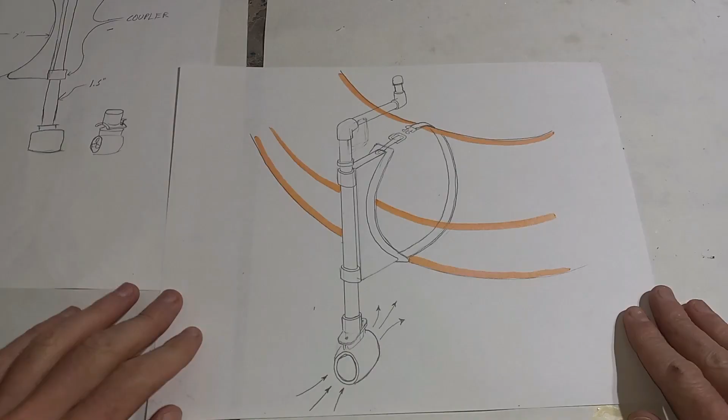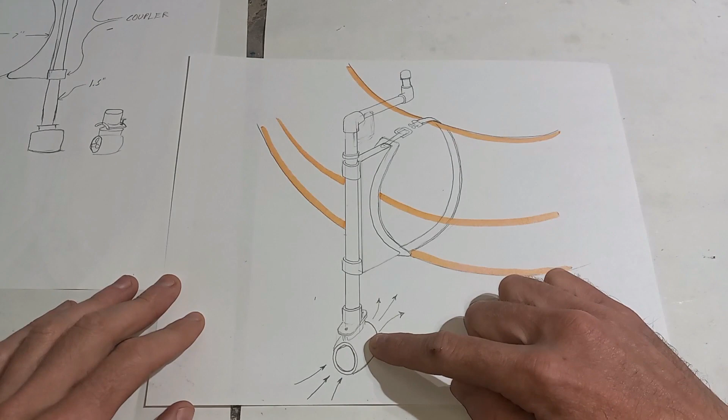So this is our plan here, and you can see this would be like the inner tube. Basically it's a waterproof thruster motor that goes on the end of this PVC steering apparatus, and we hook up drill batteries in here to power the whole thing. The idea is that it clamps around any existing tube, so you could take this to tubing outings and just throw it on any of their tubes.

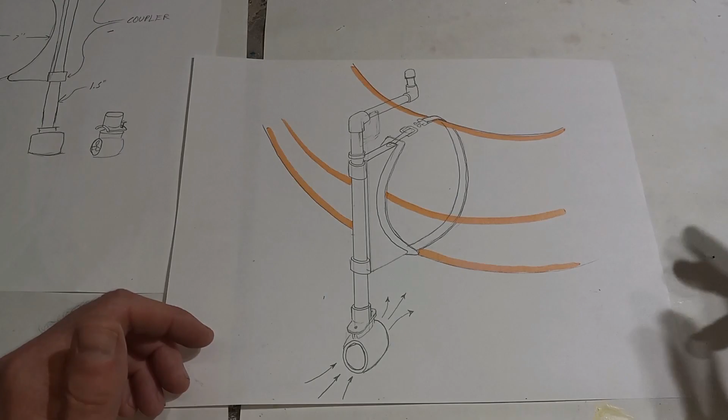For the electrical components to power this thing, we sourced one of these brushless underwater thruster motors from Amazon, and this should provide enough power to push it around. I've seen reviews of people using these on kayaks and stuff, so a tube, it's not as aerodynamic, but it should probably work just fine.

And then we have a brushless motor ESC here, a speed controller. Why I went with this one is that it has a built-in rheostat on it, so it's kind of like cruise control. Basically, you just spin this and that sets your speed.

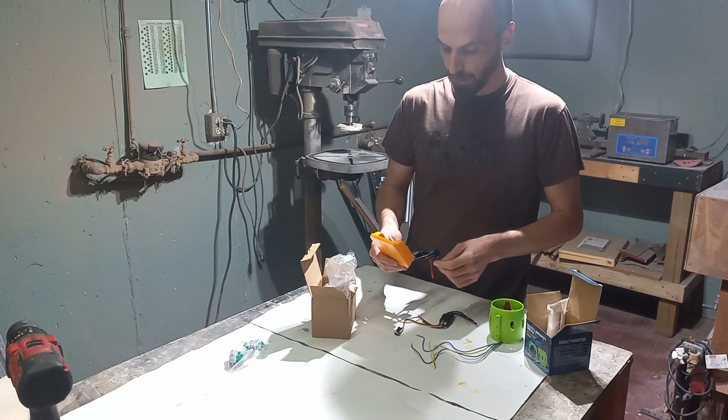And then to provide power to it, we got these drill battery adapters, and they make them for Milwaukee, Dewalt, pretty much all the big name batteries. I have Bauer, which is the Harbor Freight ones, so that's what these are going to be used for. These are actually the Dewalts, but supposedly they work on Bauer as well.

So let's bring you in here and we'll start just setting stuff up to test the functionality before we get into extending wire lengths and making the rest of the apparatus.

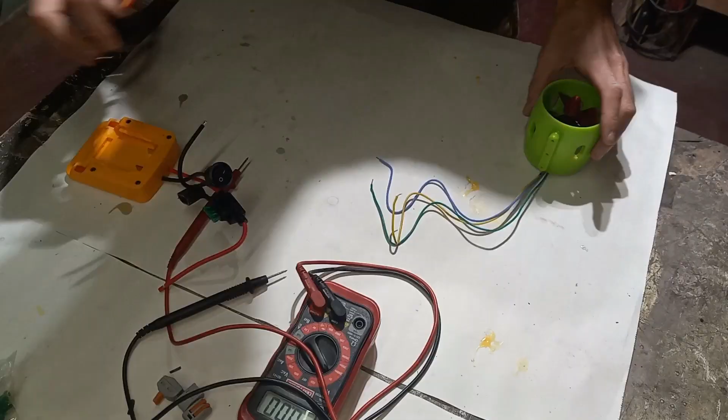To start on the wiring here, I did run into an issue: Dewalt is not exactly the same as these Bauer battery packs. In order to get this Bauer pack to fit in here, there's a little tab here I had to cut off, and I also had to cut off these guys here. So if you're trying to use a Bauer pack, you'll have to do that, but if you're using a Dewalt, you won't have to do any of this kind of stuff, and if you use Milwaukee, you won't have to do that either. But let's just hook it up and verify that we're getting power out of here.

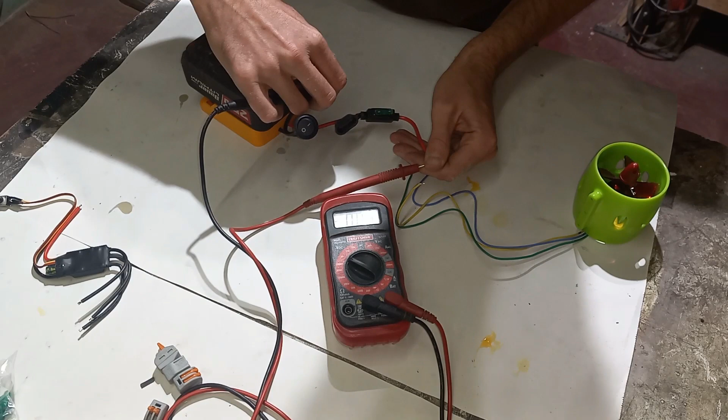Maybe we have to turn it on. There we go. 19.4, that's good enough. All right, so we'll just disconnect this for the meantime.

To run our connections here, the battery pack goes to these, and then these three wires go to the motor. Pretty easy setup. And just to test and verify that everything's working fine, we're just going to use these little quick connects, they work really good for this kind of stuff.

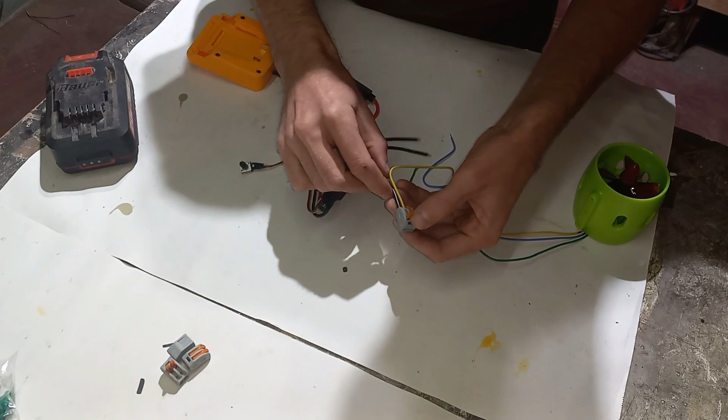That one didn't bite. There we go. All right, so we have everything wired up, probably took a couple of minutes. It's pretty easy to test out with these things and clip them all together. So let's throw in our battery pack here, and I think we are on. Let's test and see. So that's full power. And off. All right, that's awesome.

So that's motivating enough to continue with the rest of the build here.

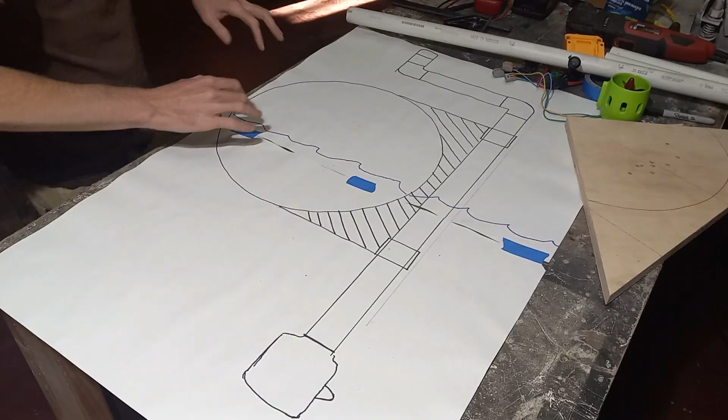So to help out with the planning, I quickly drew up this sketch. It's a roughly full-size sketch of the tube here, our front wood bracket, the motor, and then the steering handle, so we can get an idea of where we're going to lay things out.

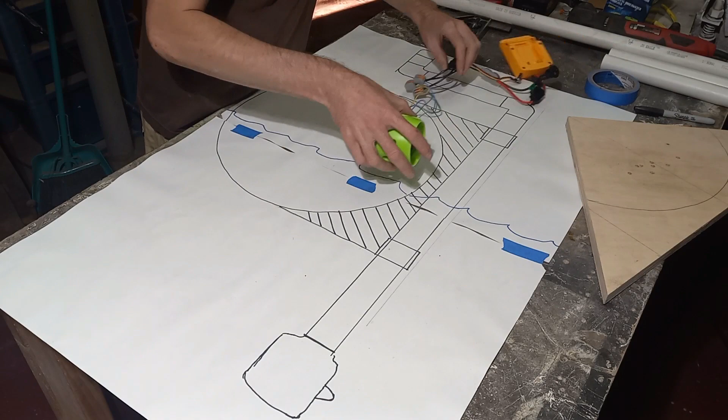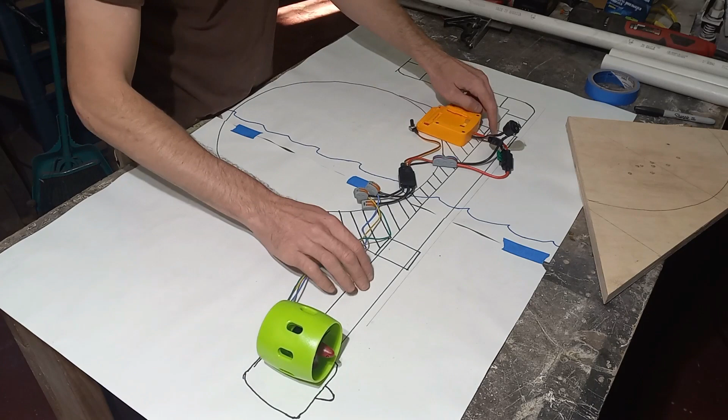Our battery pack will probably go up on top somewhere here, and then this will go in the tube, and our knob here will come up through the handle. Then our motor mounts down here, and what we're going to do is make this a slip collar, so if you're coming up on rocks or something, you can pull up on the handle and you won't get this thing torn off. That's the idea, we'll see how well that works.

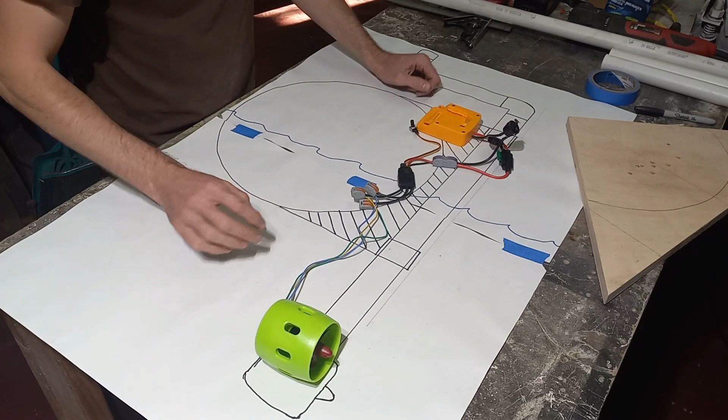But we got our water drawn in, and that's accurate. I think to continue, let's get this out of the way, and we'll start making up our wood piece here. This is just a chunk of 3/4 inch plywood that I already roughed out a similar shape on, and that should work. So let's start by cutting this out on the bandsaw.

So we have the wood piece cut out, and right now we're just figuring out where we're laying out our pieces. We have this 1-inch PVC tube cut down to 24 inches, this one's 8 inches, and this one's 3 inches. And then we have 2 couplers, an elbow, another elbow, and a cap.

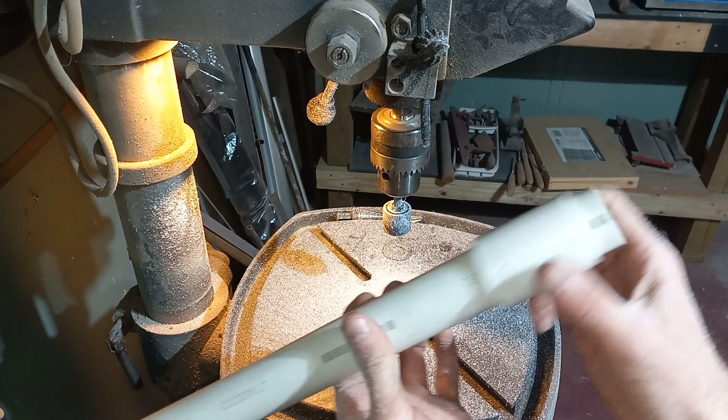That freely slides. That's what we want. So then we'll just do that one more time.

So on these same collars that we just drilled out, now we want to drill roughly an 1/8 inch hole through both sides in 2 places.

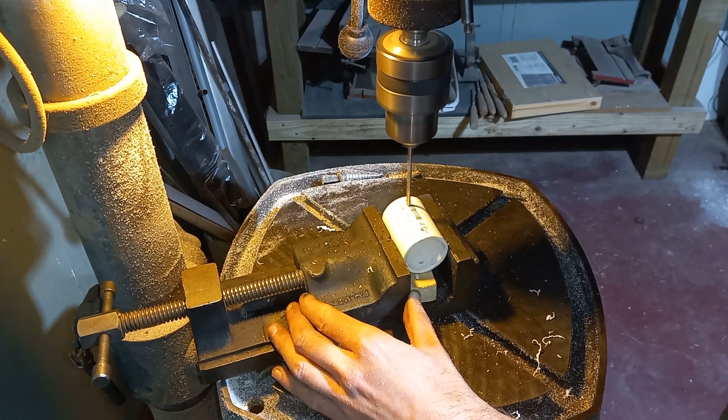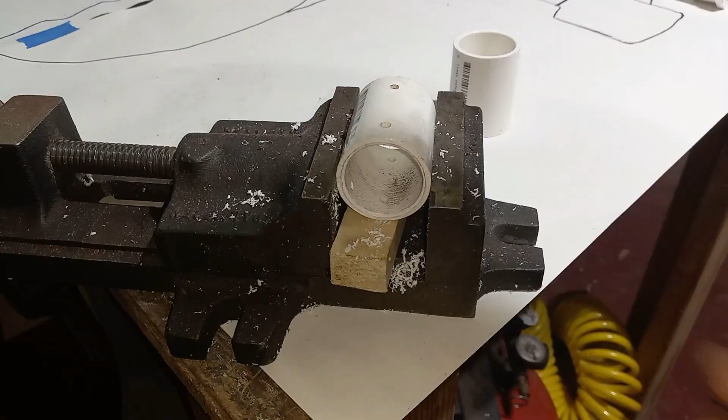Alright, so after we have those 2 holes drilled, now we're going to drill out the bigger hole. And we just want to dimple in the surface like that so the screw sits flush.

Not much, just a little bit. Yep, I think that's good. So then that'll slide around there perfectly.

Great, so now that we have all these drilled out, we're ready to mount it to this guy. So we'll just kind of clamp that in there for the time being.

Alright, so there's my hole pre-drilled. You can kind of hold it and aim it at the same time there. Yeah, that one's better. Line it up.

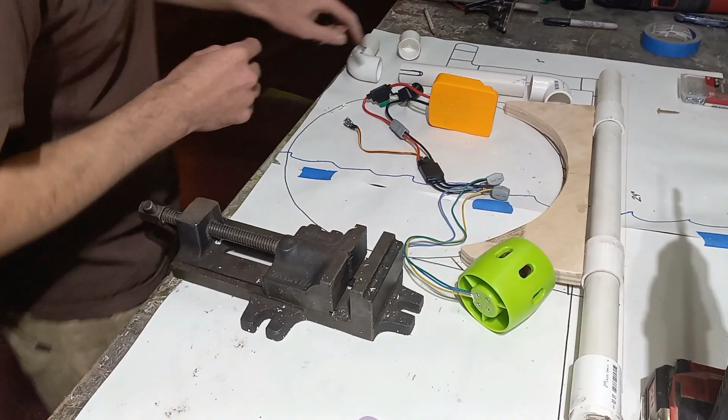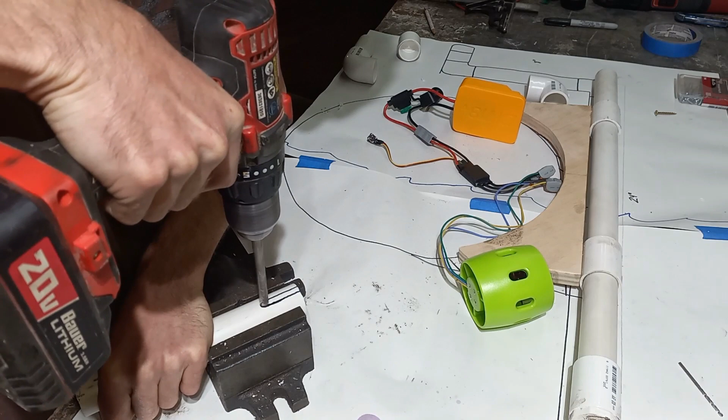All right, then in the bottom of this tube here, we need to cut a slot so that our wires can come down and around and slide in. So to do that, we're just going to start by drilling a hole. And then we'll use our multi-tool and cut it into a slot.

So now that we have that slot in there, we can take our elbow that goes up there and glue it up so that this piece is pointing down, I think that direction, pointing down the same way that this is pointing down.

Alright, we want this pointing the same direction as that. And that looks close enough.

I think what we're going to do is mount our rheostat, which controls the speed of the motor, in the top of the handle. So we're going to pop that through the top. To drill that out, we're just using a 1/4 inch. Right in the middle looks good.

Just test that it clears. And that should be pretty good. And then when we assemble it, that's just going to have to get epoxied in there.

Right now what we do is we just have this bottom section here glued up in here. So that is one assembly. Then we have this glued up here, so that's another assembly. And we have this glued up here, another assembly, and then this is loose.

So these unions, so we can run our wires all through, have to be separated just for ease of assembly, I guess. But so what we'll do is we'll take this, slide it on, slide that on, slide this on, and our cap, and press it all so it's flat. And then what we're going to do is run screws in to keep it from spinning.

So roughly there. And then here.

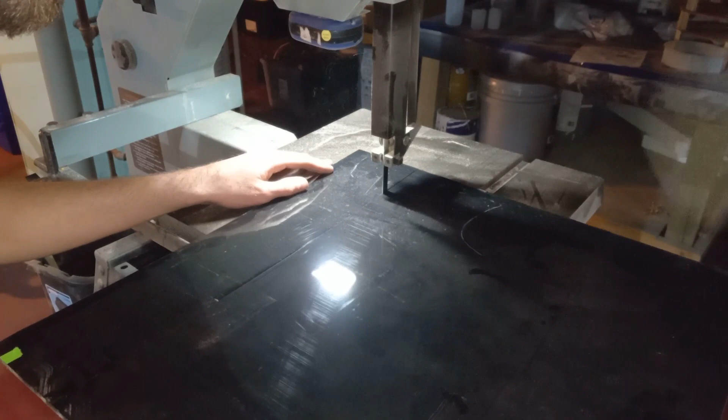So this piece of ABS is going to get flexed in here and then screwed to the inside of this. What it'll do is give it some more stability on the actual tube, keep it from twisting around, and the idea is to keep it more flat. So this is 4 by 18, or 4 by 16, and every 2 inches or so we're going to drill some holes in here.

And then we'll just heat this up. I mean, it is pliable to fit in there, but we'll heat this up just to make it going in there a lot easier.

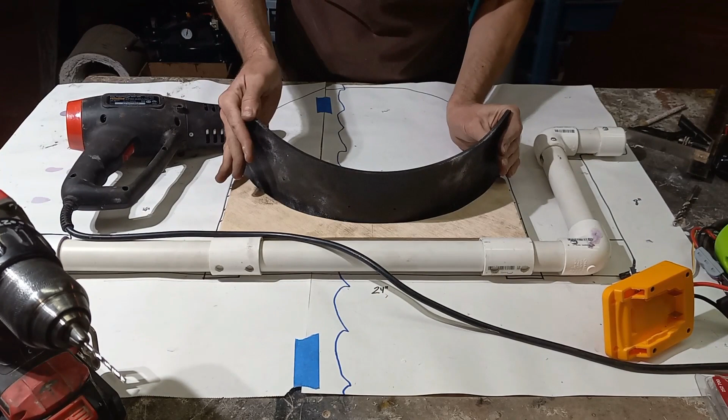Alright, yeah, that amount of bend will be really good. The rest will just kind of fill in with screws, and it'll pull out.

So to mount the motor on the bottom, we're going to take this extra scrap piece of 1/4 inch ABS, and we drew out the bottom of that circle. That'll get cut out there with our 3 mounting holes, which will then get screwed into there. And these 2 wings here, after we cut those out, we'll bend those up so that they come up around here and then screw into the side. So we'll be able to mount our motor to here and this to the bottom of that. Let's start by cutting this out on the bandsaw.

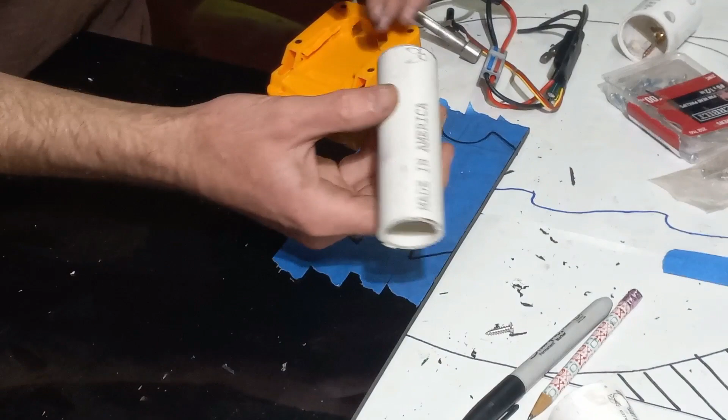To make our battery box mount, this is the size of it here. So what we're going to do is cut this shape out, simulating this tube underneath it. When that runs underneath it, this will get bent down, and it'll give it a little bit more support as well. And then we left a little bit extra over here so we can drill a hole and mount our on-off switch. So let's cut this out again.

Alright, so we have our battery mount here cut out of the ABS, and now we just need to heat bend these sides.

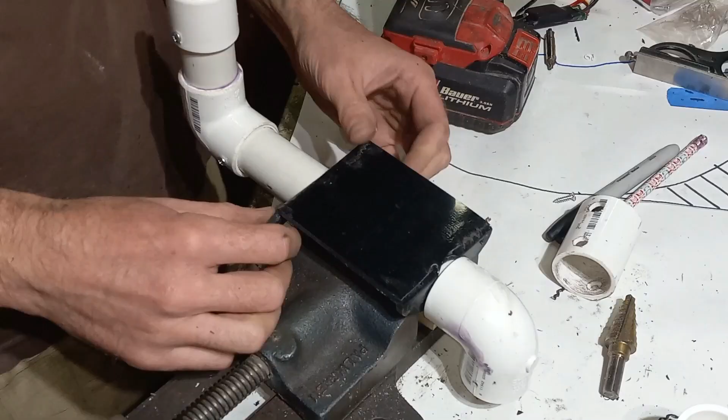Alright, let's test it on this guy. So this is where it's going to mount, on our steering handle, and that actually looks pretty good. Just eyeballing it, it doesn't have to be perfect, but we want this to be pretty much straight up and down, and this pretty much flat. And then we'll just add probably 2 mounting holes, let's say.

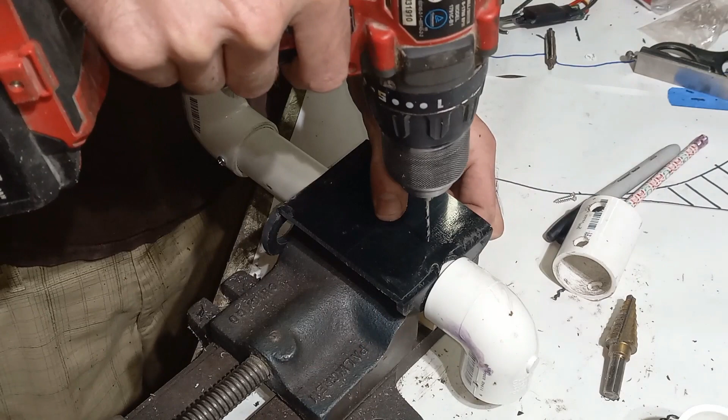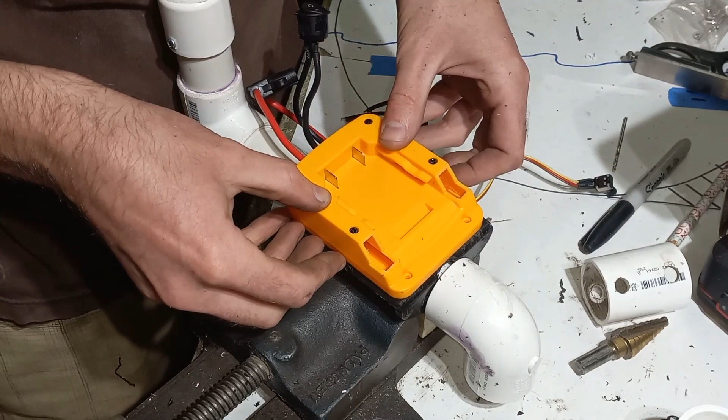Perfect. Then we do want these to be clearance holes and countersunk, so we'll just use our countersink. Pop in a couple of screws here. And then to mount our battery box here, it does come with 2 holes in the back, which, sure, let's use those.

Alright, so that is our battery box mounted on the top then. So I kind of got ahead of myself on this, and I forgot that I needed to put these back on before I painted it. And before I painted it, I needed to epoxy these in just to give it more strength.

So we just scraped the old paint off with a razor blade in that section there, and then we'll just fill this with epoxy. I'm just using JB Weld 5-minute epoxy, and just about any of them should be fine.

Alright, then we're just going to take it and fill in that gap. We'll let that set up and give it a couple of minutes, and then we'll be able to flip it over and do the other side.

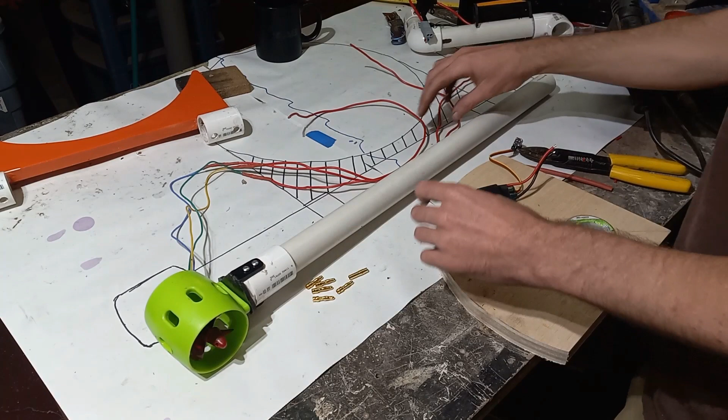So moving on to wiring, we needed to add 26 inches of wire to these guys, and then we're also getting rid of the temporary connectors and adding these bullet connectors. So on this side, we're just adding all females on the ends of this, and then we'll do all males on the other end.

So to solder these guys in, just heat this up—way too much—and jam the end in, let it cool. There you go. And then just repeat the process 5 more times.

And we have all of our wires extended, and before we run it through, we just want to test and make sure that, one, we're getting good connections, and two, that everything is wired correctly. Sometimes you make mistakes when cutting and soldering, so we're just going to make sure.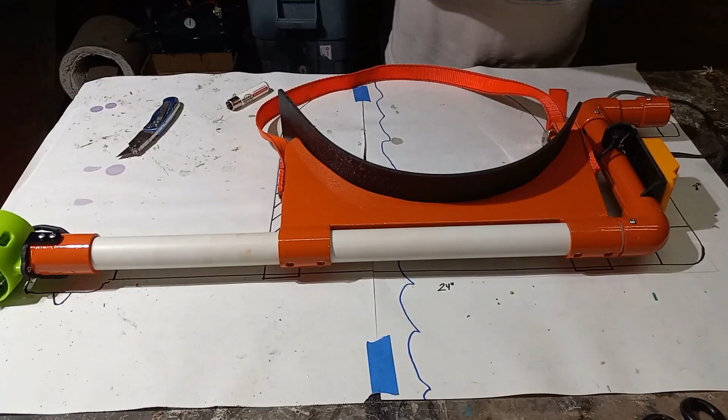Hook up a battery and check it out, fully assembled. Awesome, it works well. This battery pack is almost dead, so we'll throw that on the charger and then take this thing out for a spin. We'll find out if this prototype does what it needs to.

So unfortunately, I don't live on a lake and I don't have a river near me, so we are loaded up in the car to go to a little lake pond around here and test this bad boy out and see how well it does.

Alright, so let's unload this stuff, set it up. No problem. Alright, so then I'm going to take this, set it on the front here, and run our strap underneath.